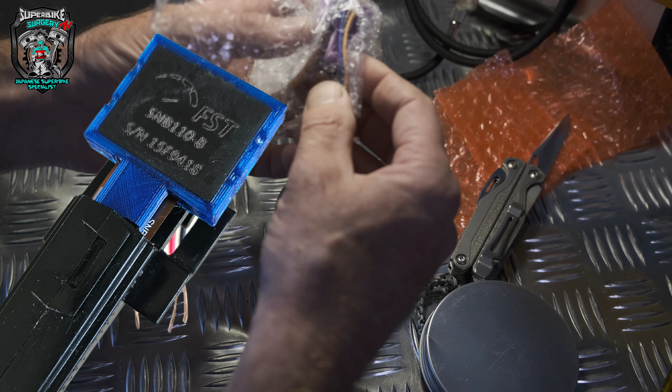I also saw on the pictures the guy sent me an email that there's a 3D printed part of it, which was slightly worrying because 3D printing generally isn't fuel resistant.

Okay, so that's what you get. Interesting. This is 3D printed. I'm guessing it must be like nylon, 6/6 nylon or something.

Oh look. Okay, we're obviously going to have to take apart the original plastic piece. Right, so let's get the old sensor out.

I'm going to go on their website, see if I can find some fitting instructions, because there doesn't appear to be any, unless in this packet he sent some paperwork maybe. Or is this just customs declaration-y stuff? Stand by. Yeah, no instructions whatsoever.

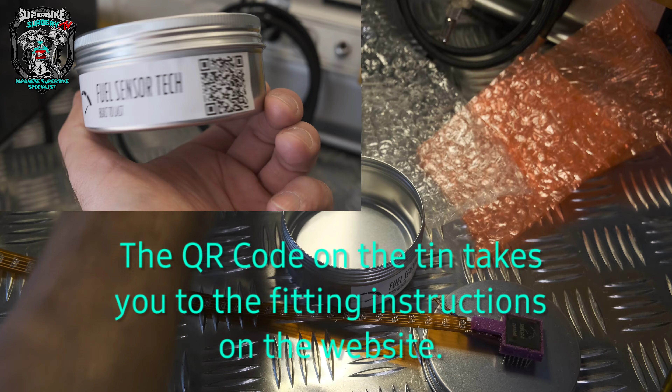So let's go on the website, see what we can find out. And yeah, maybe this actually will turn out to be quite a useful instructional video for somebody that's bought one of these. See you in a minute.

Okay guys, so there are some fitting instructions on the website. There's also a YouTube video, a guy talking in Spanish though, and he talks really fast, so the subtitles whiz by, but it looks like a pretty simple procedure.

Anyway, yeah, so I've got to get the old sensor out. I'm not going to show you that because that's in the original video I did with Ben out on the road, so I'll put a link up in the corner here if you want to go and watch that first. We'll get the old sensor out and then I'll show you what's going on installing this. It all looks pretty straightforward. A little bit of soldering to do.

The video showed a guy in Spain doing this, and they included some little heat shrink connectors for these wires, but they don't appear to be in this kit. As he does in his video, you want to solder and heat shrink the wires to make it as good as possible. Let me get the old sensor out now, then we'll install the new one in the plastic piece. The plastic strip thing has to come apart to slide the old one out and slide this in. It'll make sense when you see it.

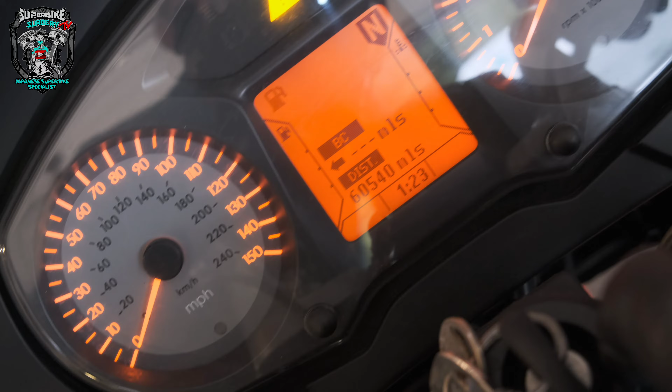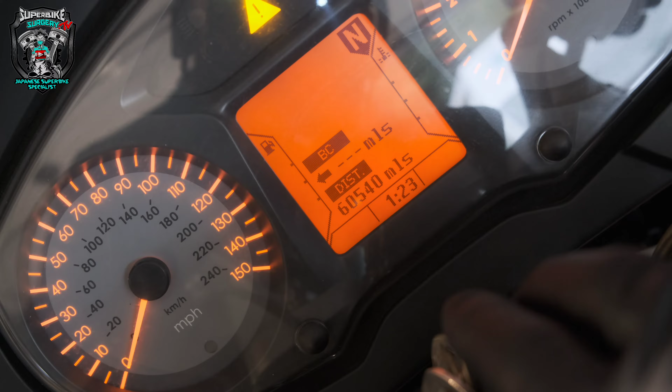Just to show you, before I start taking it apart, the fuel gauge is basically reading zero, flashing, so there's no fuel in it according to the sensor. It's been like that for a couple of years now, since the other sensor failed. I was like, nah, not putting another one in it, I'll just fill it to the brim and use the trip meter. So that's how it is now before we've done any work.

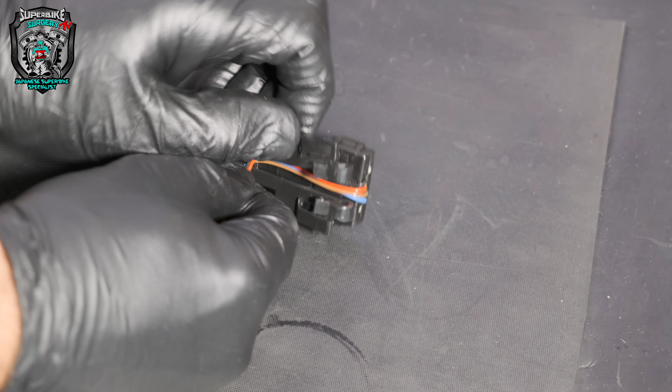Okay, so over on the other workbench I've got the sensor out. Let me show you how this comes apart, super simple. All you do is get these wires up through this bracket, and then this just pulls out the end, and the original strip comes out. Simple as that. What I'm going to do now is cut these wires off, get the other sensor, and stand by.

So the colors match, or sort of match. We've got blue, brown, red and black, and we've got blue, brown, orange and black. I need to double check the wiring, but it makes sense because they're in the right order - blue to blue, brown to brown, red to orange, and black to black.

So I'm going to chop this connector off here, then solder the wires to this, solder an adhesive-lined heat shrink, and slide it into here. I'll show you it in stages as I go.

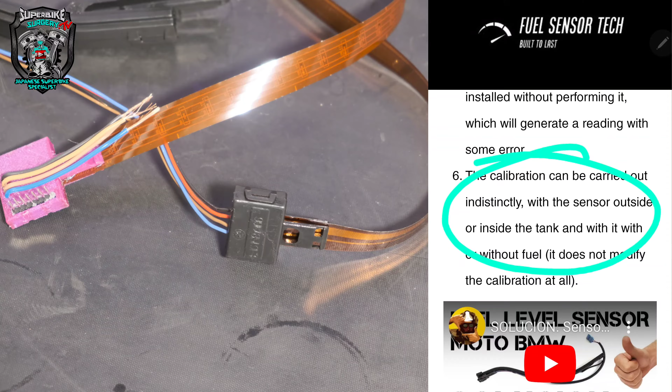I'll flash it on screen, but it says on the website that it doesn't matter. The issue with the original one is it's got to be dry to calibrate it. I won't go into that since I covered it in the original video, but this one can just be calibrated dry, wet, or with half a tank of fuel - it makes no difference. So hopefully it'll be a nice straightforward calibration.

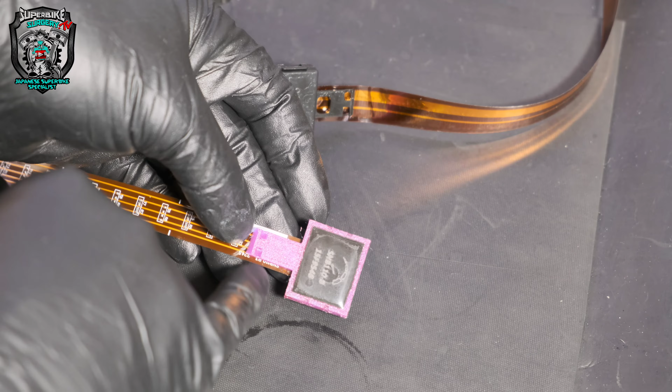I'm curious about this 3D printing, whether it's fuel proof, but it must be - this isn't their first rodeo. They've been selling these for over a year now, apparently.

And then these pins, I just chop them off. This is for a different application, so these pins apparently connect to these wires and something else. I couldn't quite dig into the information, but looking at the Spanish guy's YouTube video, he just cuts these off.

What I'm going to try and do is get on a WhatsApp call with the guy that designed it and have a chat about it, because I told him in my email let me fit one first - he wanted to get me on a call before I'd even fitted one. I said send me one, let me fit it, and then I'll have some actual valuable questions. So maybe with his permission I might film or record that call and put it at the end of this video. We'll see how we go.

Let's get this connected up, soldered together, and get it back in to see how easy it is to calibrate. Should be straightforward.

Okay guys, so that's soldered and heat shrunk together. It's just a case of sliding this in now, got to get it the right way round. Feed that in there, feed these wires down through that little centre bit of the plastic. Sorry, I'm trying to do it without getting my hands in the way, which is basically impossible. Perfecto, it just clicks in.

And then I've got to cut these pins off, apparently, which seems a bit weird, but that's what it says to do. Cool, now put it back in the bike and do the calibration.

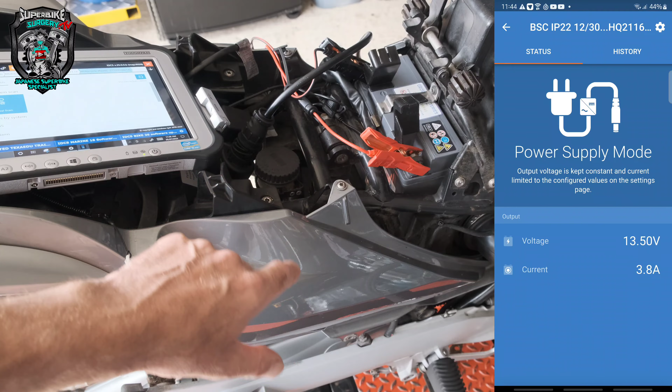Okay guys, so for calibration I've got a power supply hooked up, a battery tender, set to 13.5 volts, so that will maintain the battery voltage at 13.5 volts regardless of how much current it pulls. That's apparently super important when doing the calibration. I'm not going to go right into the weeds with it because I'll link to it again in the description and in the popup up here - you've seen it before in that other video, so there's no point boring you with it this time round.

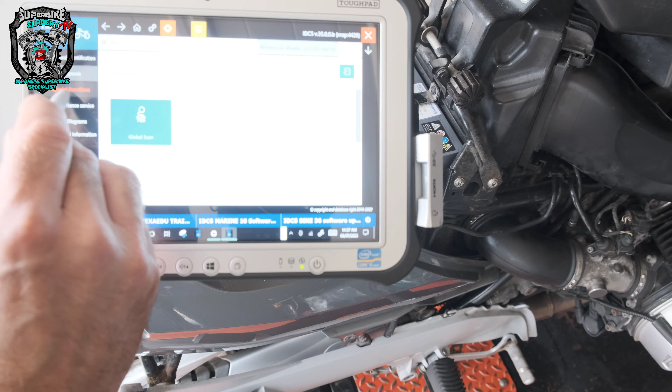So let's do the calibration. I'll show you a few screenshots here just in case you haven't seen that video and can't be asked to go watch it, and hopefully it will all just work fine. Okay, so we need special features, special settings, and this one here - tank float calibration, plate transducer. Start, gives us loads of different warnings from memory.

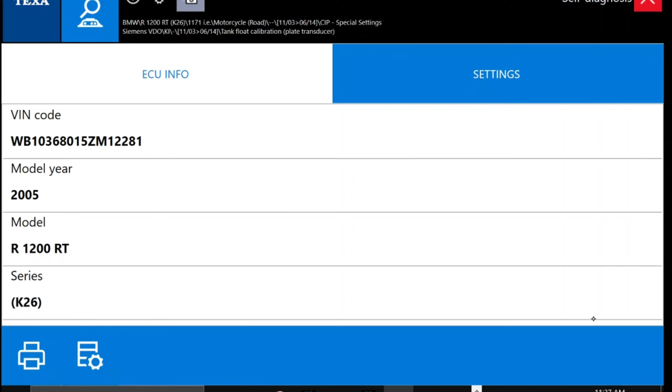Settings. Start. Yes. Confirm.

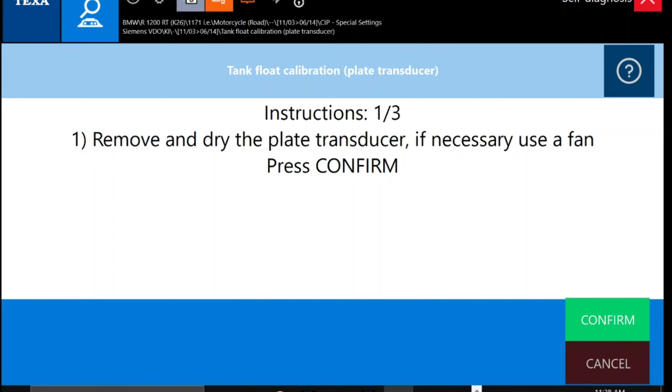Even dry, yeah, we're going to ignore this dry plate transducer reading, because apparently this thing can be in fuel, it doesn't make any difference. Make sure the transducer does not get hot. Okay.

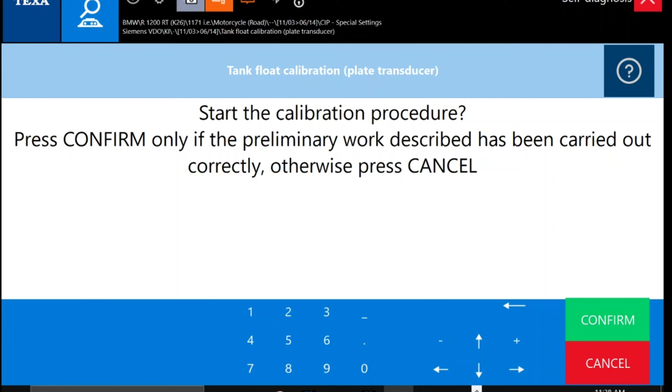Okay, so we're ignoring some of these because it's not the original BMW transducer. Okay, so we just need to wait now. Fast forward this bit. Okie dokie.

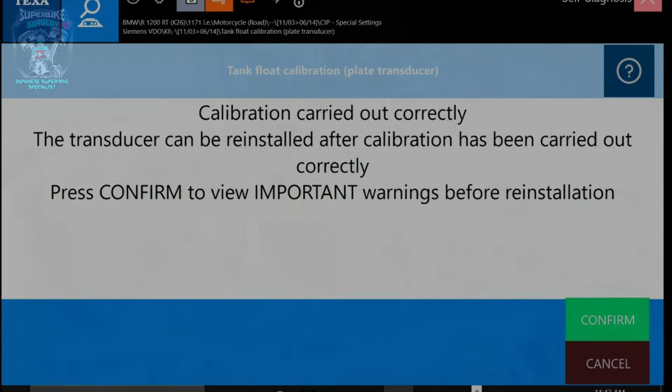Well, that's promising. Calibration carried out correctly. Okay, it's already installed, but so we just ignore that. Confirm.

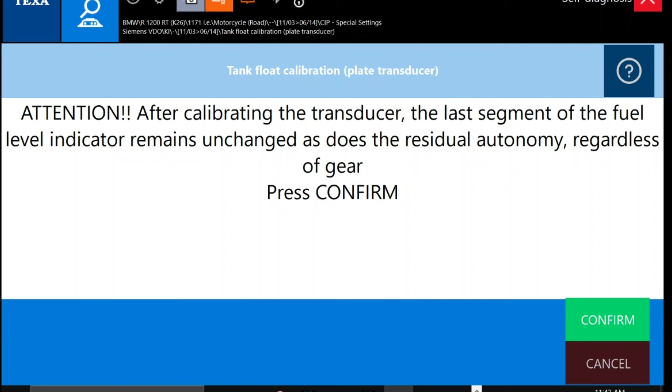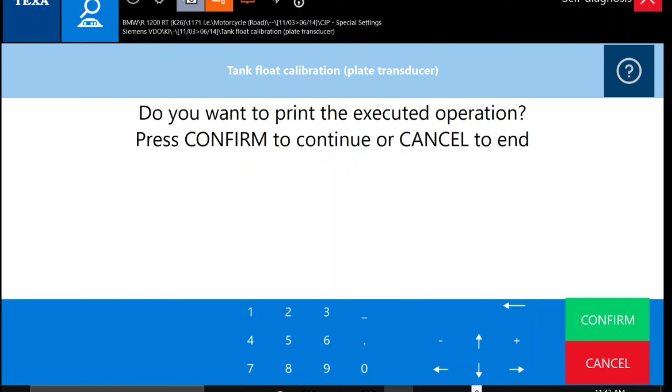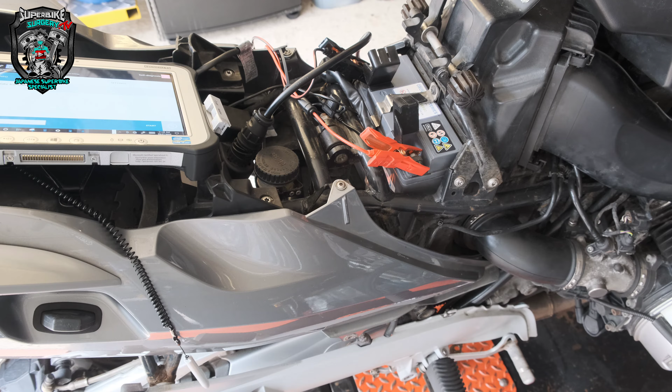Okay. Confirm. No, I don't want to print anything. Okay, right, so it's not showing anything yet.

What we'll do is cycle the ignition, and normally you have to pull the clutch in and wait about 40 seconds, I think it says, and we'll see what's occurring. This is really hard to film without getting glare on the screen. Okay.

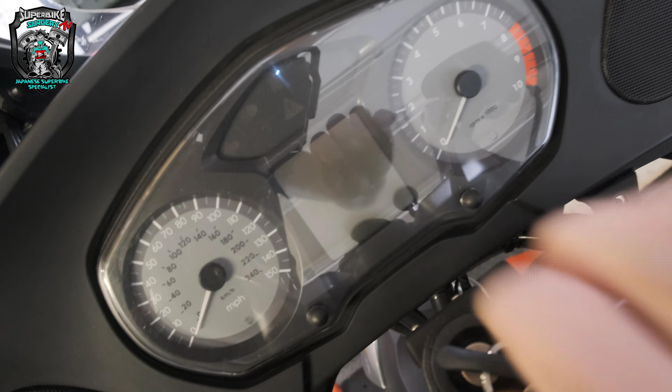Holy shit, can you see that? Just worked. Well, that's a good sign. So, assuming that there are no reliability issues with this thing, then this could potentially be the fix for these very annoying BMW fuel strips.